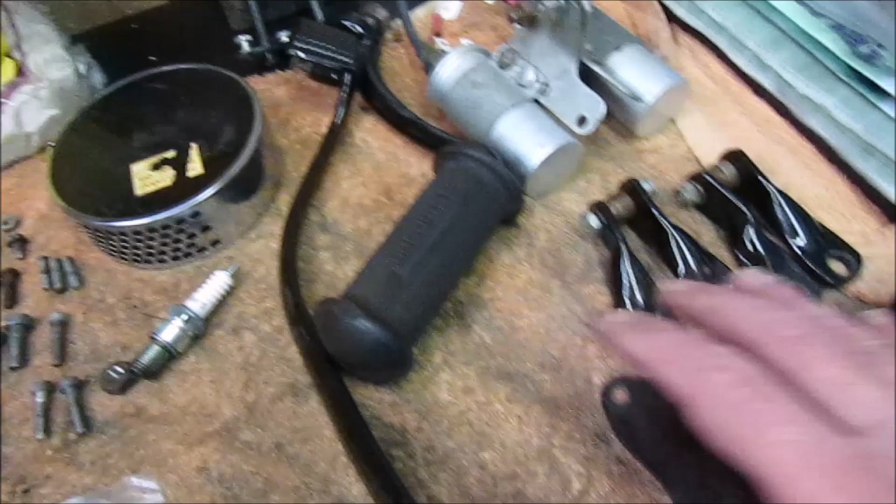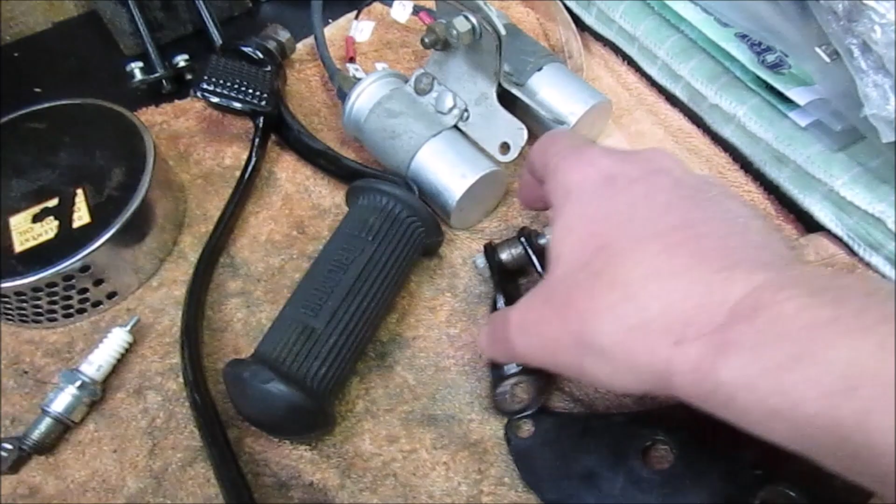Also sifted through, found a few more bits. Then we've got our miscellaneous. Obviously we've still got the left side engine bracket, footrest hanger, footrest, rear brake lever, got the coils to do, and try and work out what these are for. I've looked through the manual and as yet haven't found anything for those.

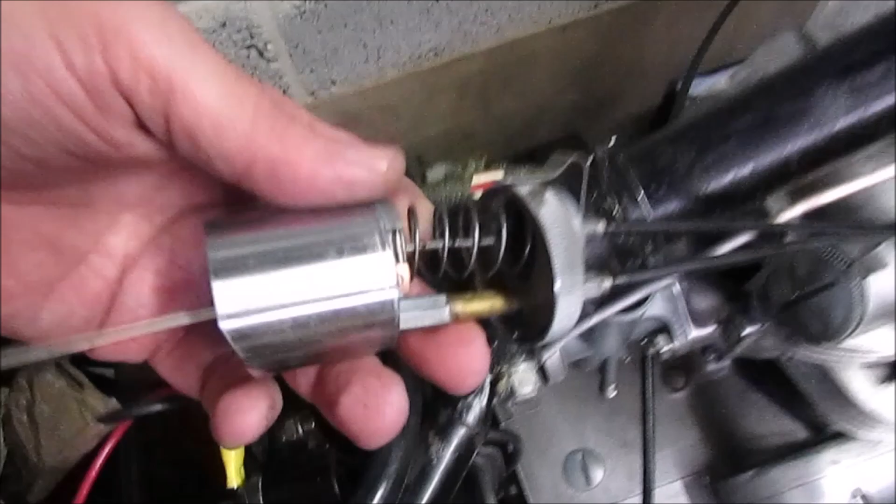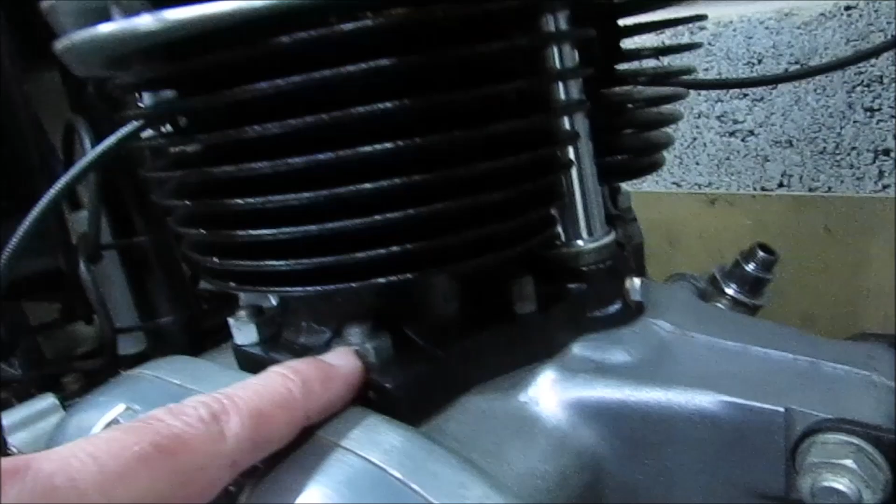So I've unwrapped also the actual throttle, so we can get that slid in. I'm going to have to take the carb off unfortunately and slide it in, get the airbox in, but get these bolts in. And the inner nuts, as you can see I've got the outers, now I've found the inners, so I need to get them done, get the tacho installed, just start working through.

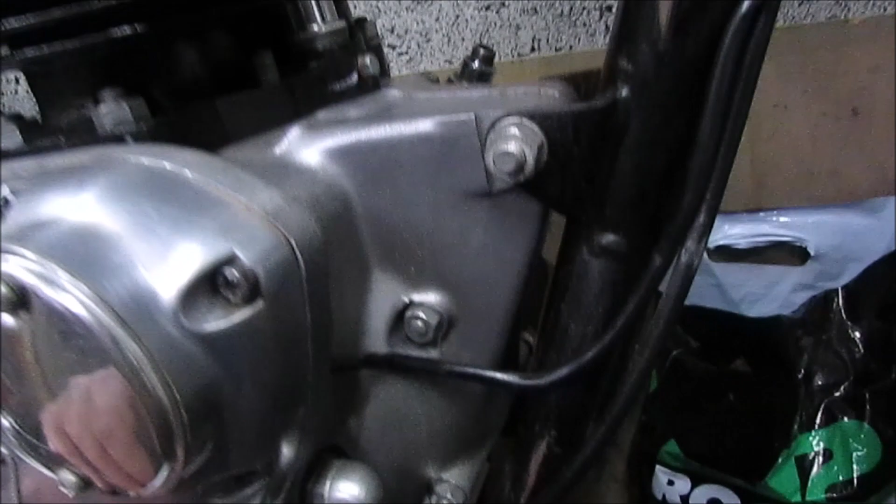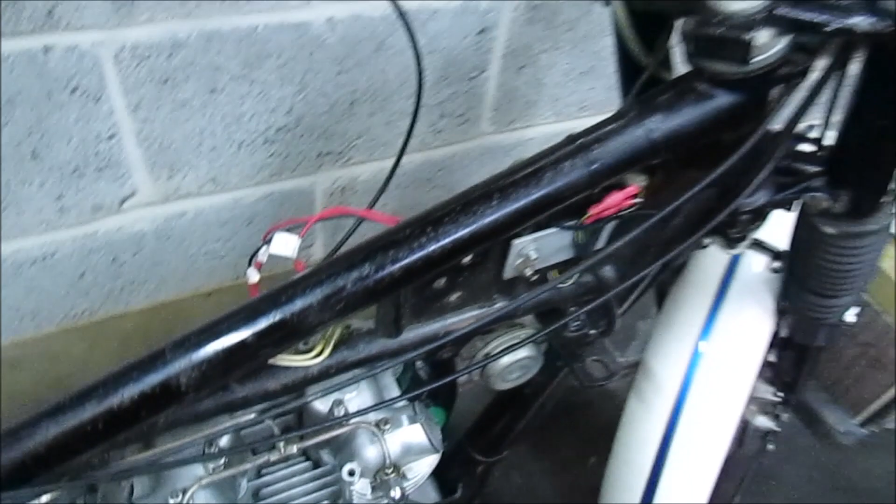I managed to find the tank rubbers, so we've got one at the back, one here, one on the other side, and then it's into my favourite area, wiring. Should be quite a simple wiring loom. Most of it's been numbered or actually labelled. Just want to see how much of this side we can get done, and then we'll turn it over and we'll start to work on this side. So we've still got clocks to go, and then a complete sweep from the front through to the back, just making sure everything's okay.

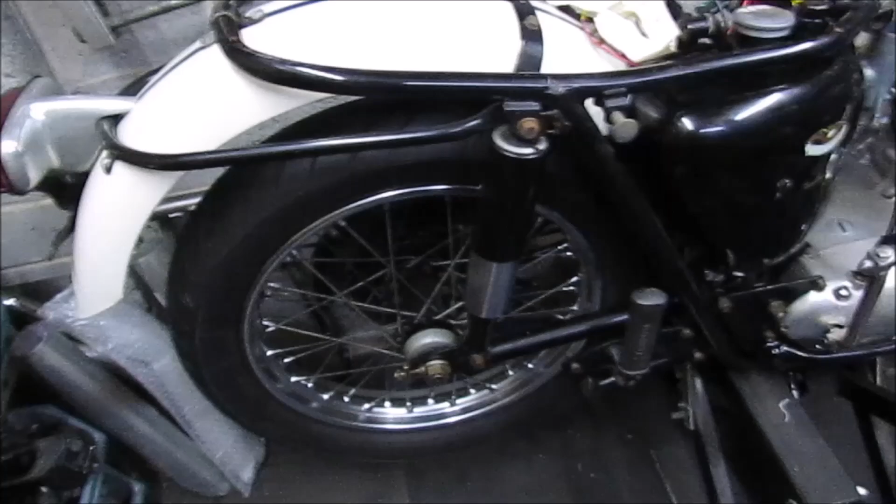But I'm happy with the progress we've made so far. It's been a big learning curve. It has been extremely exciting to do it, and I can't thank Pippa and Ian enough for giving me the opportunity to do this. It really means a lot. You know, I'm learning all the time, and this is a huge project and a huge learning curve, and basically honoured to be given the privilege to do it.

But let's crack on, get these bolts in, get these nuts in. So we'll start with the exhaust ones first. We've got one each side. And then the inlet ones. And we can get them tightened down. Then the inner nuts. So 2 front, back. And we can get them tightened down.

Right, so that's all 8 nuts on now, so I've just got to tighten the front 2, rear 2 and tighten these down. Right, so that's the 2 rocker ones this side, 2 rockers the other side done and tight, and also the inner nuts. Next thing we're going to do is torque these 2 down, same on the outside, and also these inners.

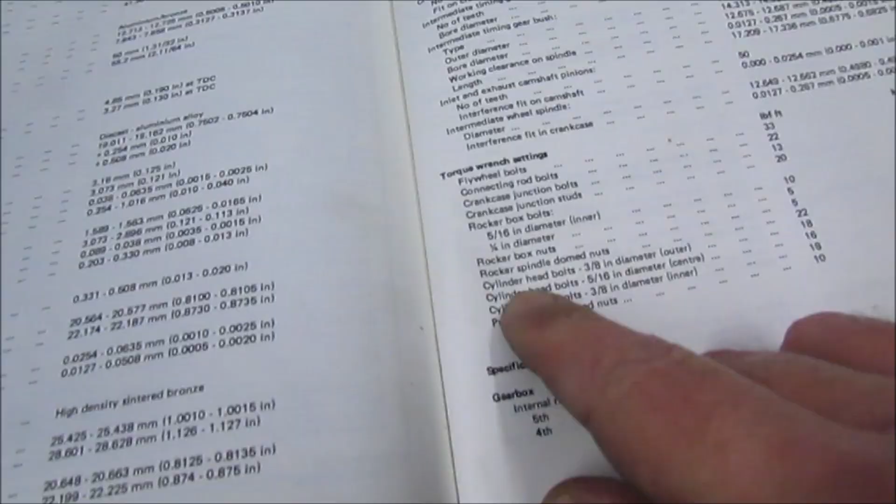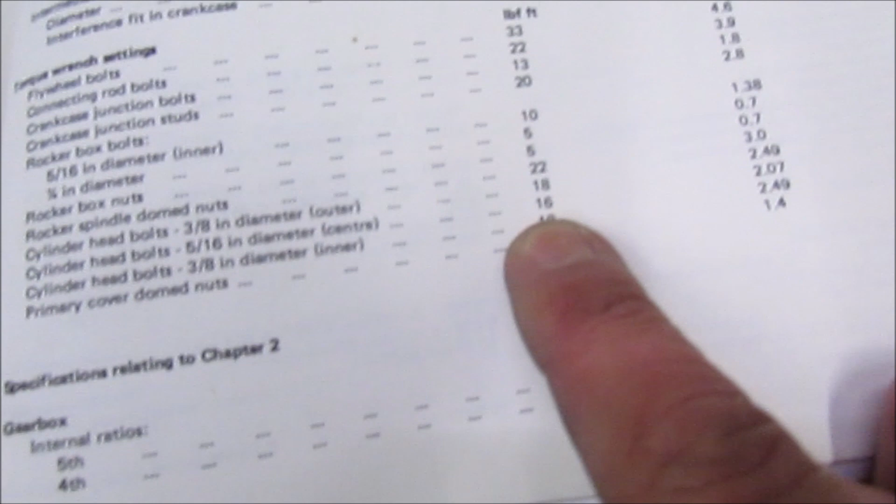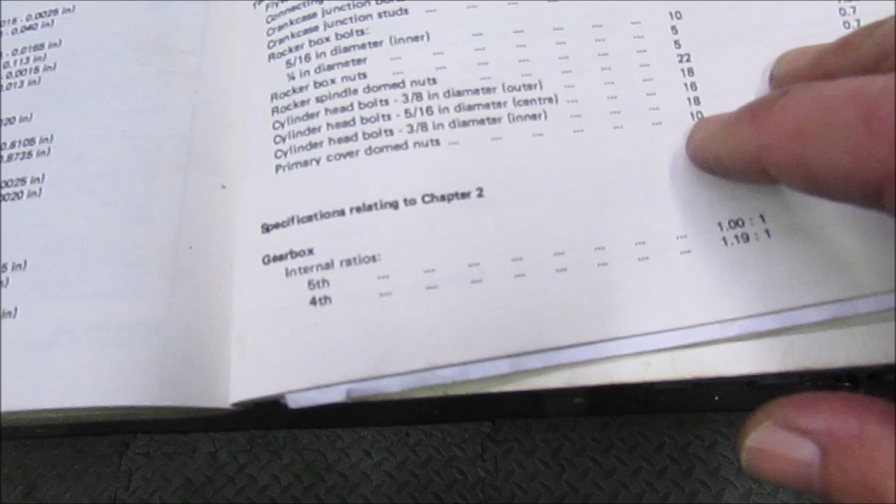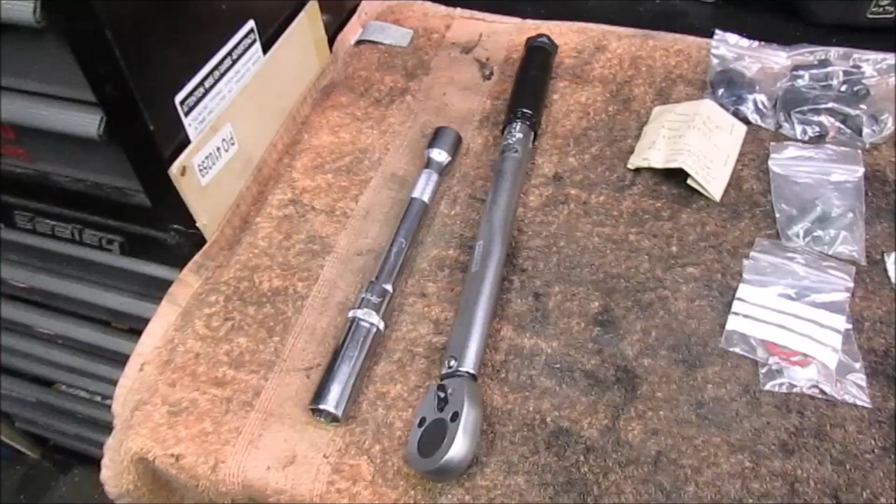So looking at the Haynes manual, if you've got it, page 153, cylinder head bolts 3/8 inch outers, 18 foot-pounds. The 5/16 centre is 16 foot-pounds, which is that one there. And the inners also 18 foot-pounds, which is these. So 18s, 18s, 16s. So torque wrench is out, ready. Just got to set it to 18, and then we can get those done.

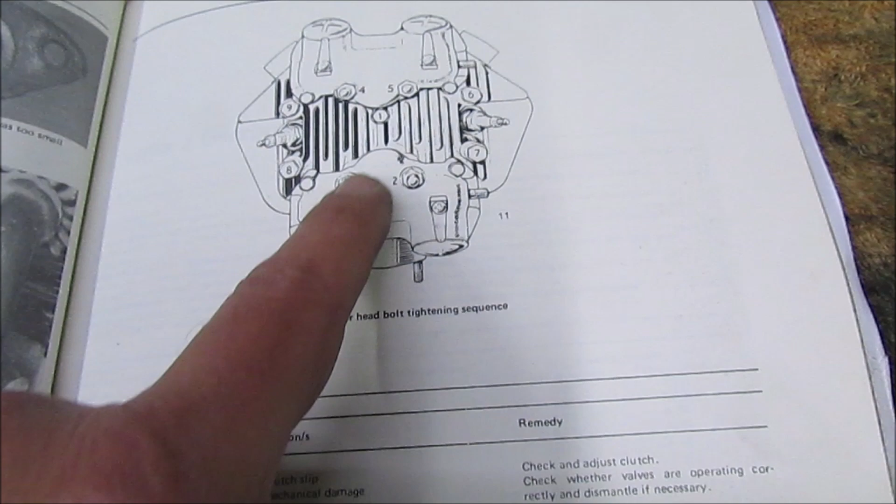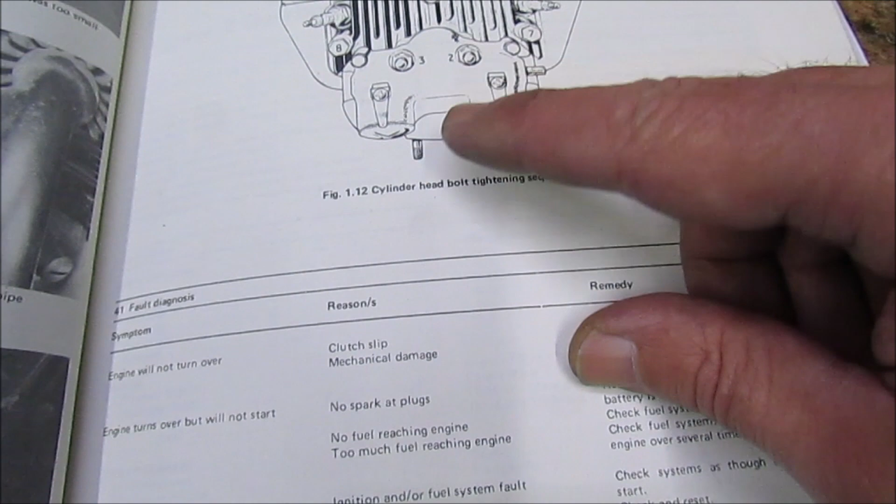Right, last thing before I nearly forgot, the actual cylinder head bolt tightening sequence. So I'm going to have to interchange as centre 2, 3, 4, 5, 6, 7, 8, 9. So it basically works on a pattern from the inner out. So that's the one I need to do first. So that's the back of the engine, that's the front.

So it'll be that one, that one, then that one, 4, 5, 6, 7, 8 and 9. So basically working in a spiral. Right, so here we go. I'll probably speed this up as I go around.

So that's all the head nuts now torqued down. So there's the pattern again. Alright, move on to the next job. I'll just take out this carb quickly, then we can get this slide in. I'll get the airbox in as well. It's not a huge amount of room. It shouldn't be too bad. Right, so that's the carb undone and off.

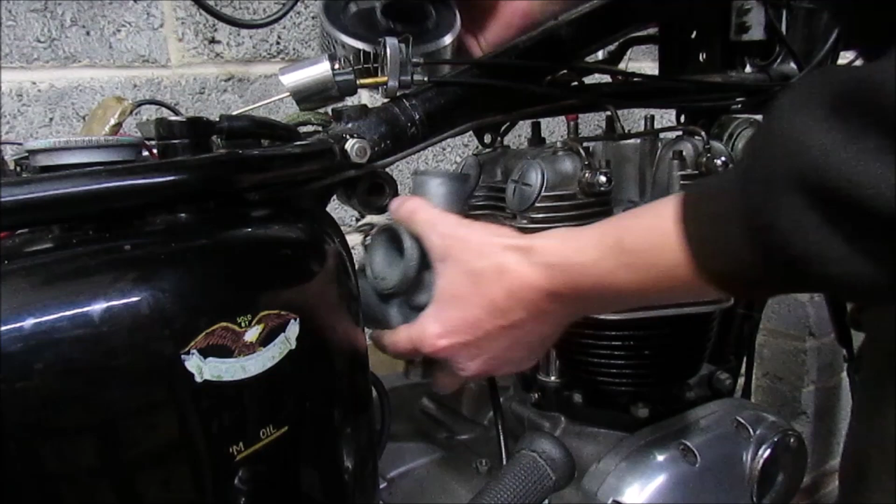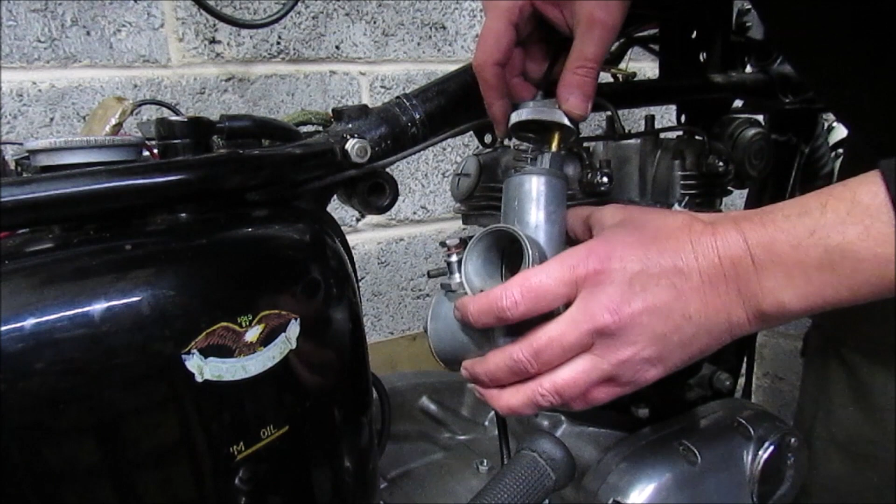I actually can slot it round and turn it so it's actually sitting in there. So the airbox will go on later. We'll actually put the fuel line in. I've got to make a fuel line up. So once the fuel line is fitted, the airbox can go in. So for now, I need to make sure I get this the right way around. Right, so this plunger, you can see in there, fits at the top.

Which is actually easier said than done. Right, okay, I've just noticed I need to release that screw, which will remove that so I can actually screw that in. All learning. Right, let me get a screwdriver and we can take that screw out.

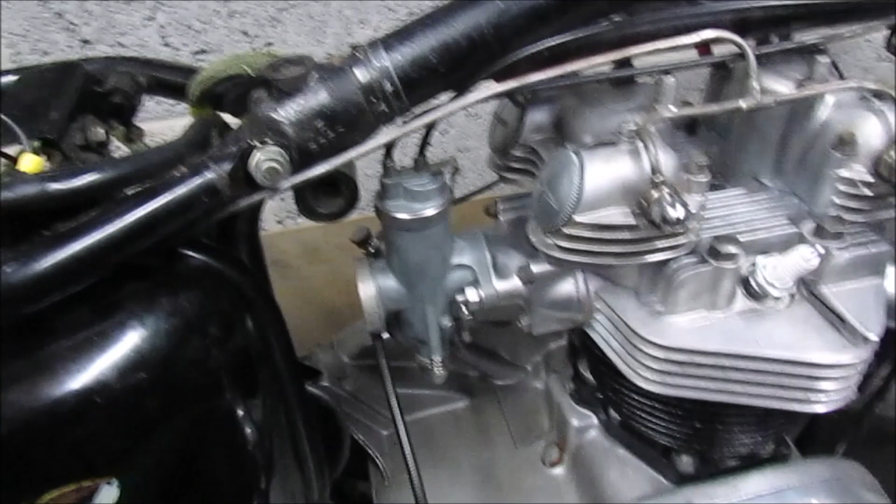Right, so I've just got to bolt that in. Right, so that's all nicely now back in place. Tuck the cables behind for now. Need to adjust slightly. Right, so now trying to see what other cables we've got. Right, there's another one there. So that one.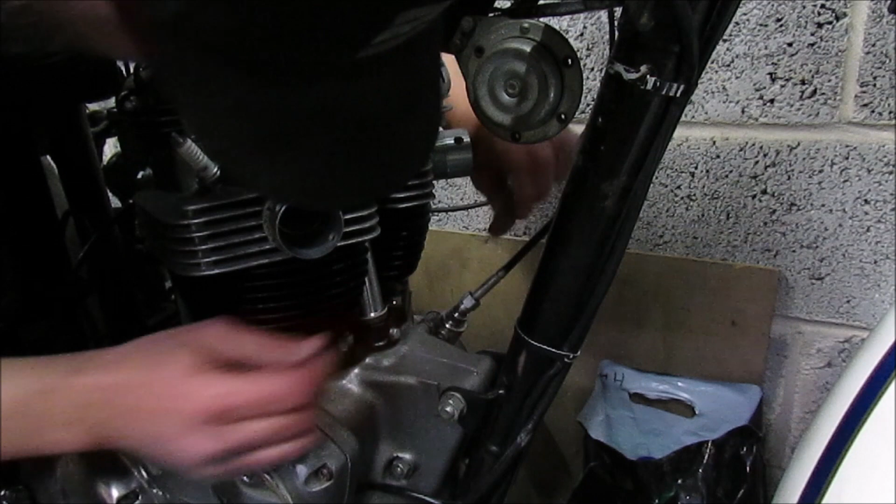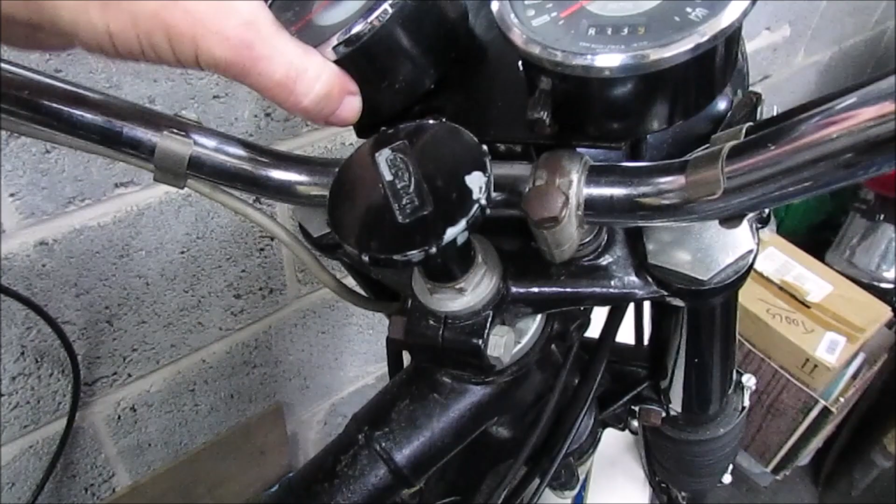Right, so that one is tacho. So I just need to, that's now installed that end. I just need to get it fixed to the clock. And then this one is speedo. Right, so we'll trace that one back later.

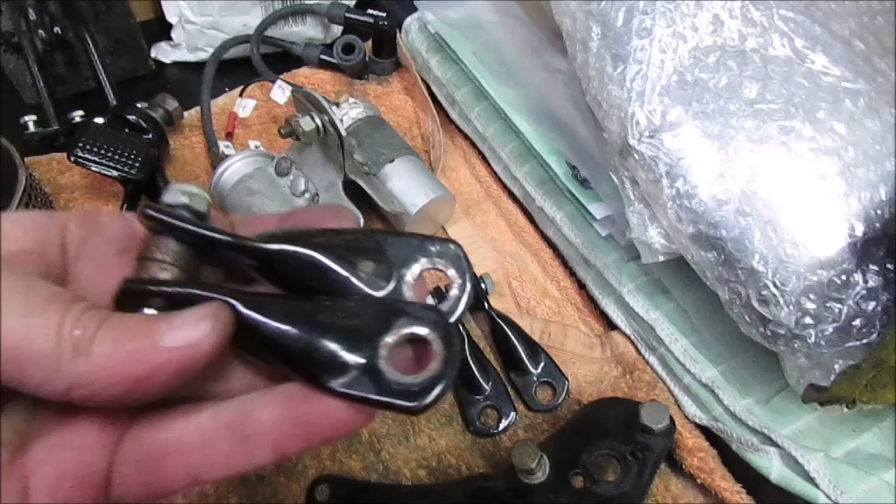So tacho's installed, engine this side, obviously I've got exhaust to go on, it's basically done. So airbox we can't put in until we get the fuel lines in. So I think next one we move up to get the coils installed. But like I say, I need to have a look and find out what these are for.

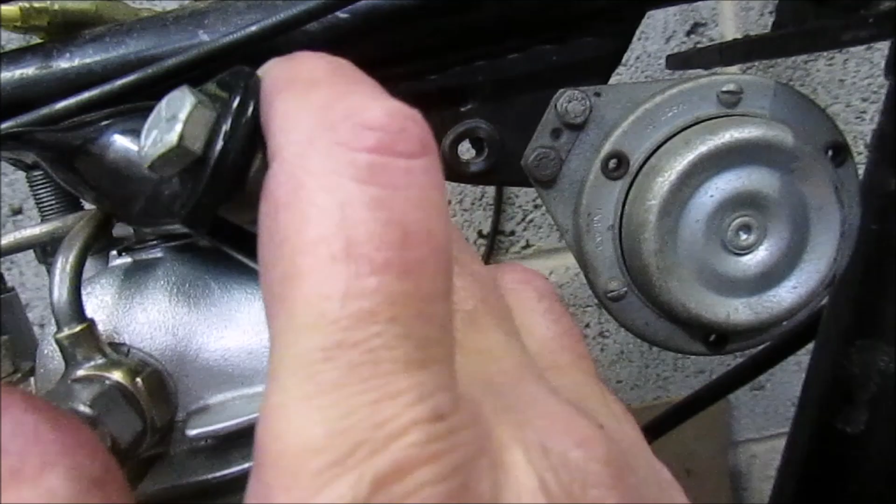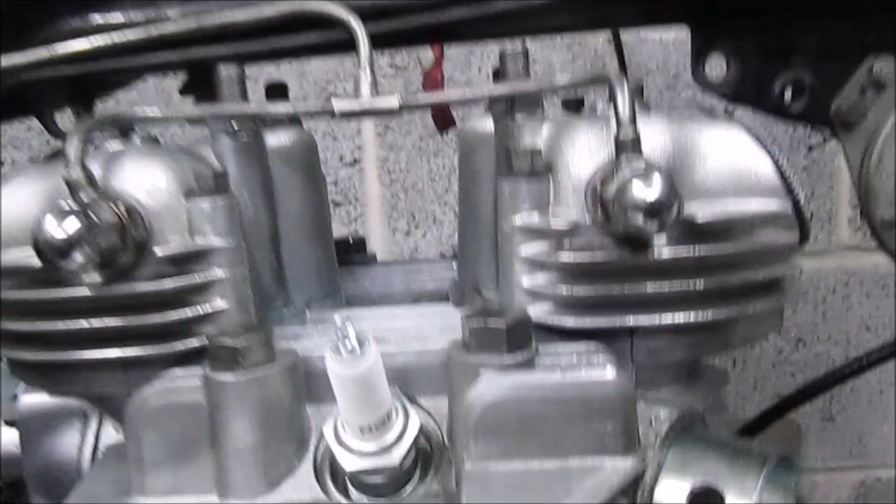Right, just had a quick look through the manual and actually worked out what they're for. Right, get you in shot this time. Right, these basically fit on top of there, bolt through that hole, and the other one obviously fits the other side, and then you've got the same this side that bolt through that hole, so I can get them installed. So that basically supports the top of the engine to the frame.

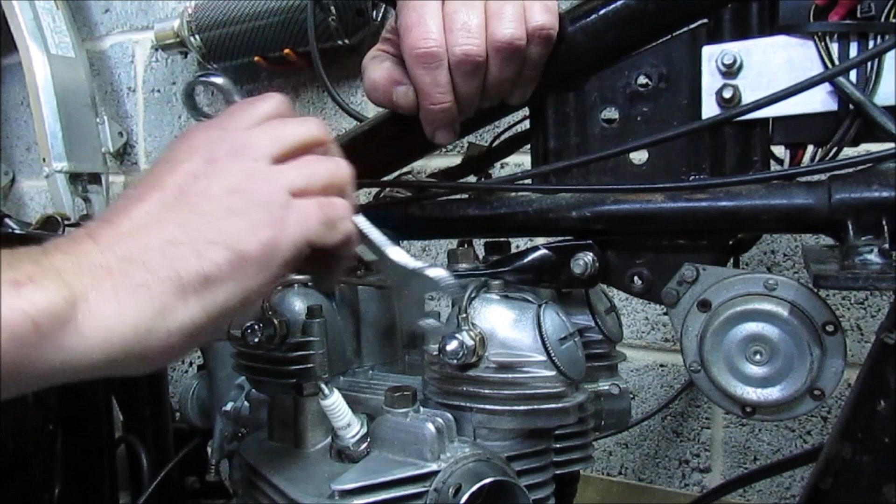Right, so let me get them in place. Right, so they're now tight and in place. I've actually tucked the oil line. Actually tucks underneath. So that explains where the brackets came from. So that kind of makes sense now.

Right, next job, probably the last for this episode. Let's get these coils installed. As far as I'm aware, they go through these 2 points. So I'm imagining facing backwards, but we'll double check that. And then going, actually no, probably through these two.

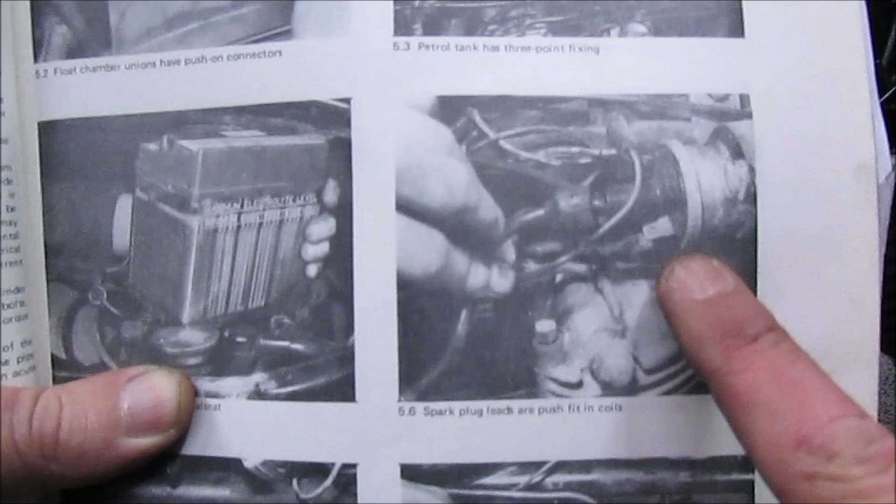Right, let me just double check. I think it should be that way. I think that'd be too far. Yep, see a picture there. They're actually facing backwards. Right, so let's get them unbolted, get them installed, and tightened up. Definitely looking more like a bike.

So I can't do much more with the carb because obviously I've got to make the fuel lines up. I think we've basically covered everything on this side. Tacho's installed, coils installed, just got to wire them in. Oil lines installed, brackets installed to hold the engine. This side bracket installed, footrest.

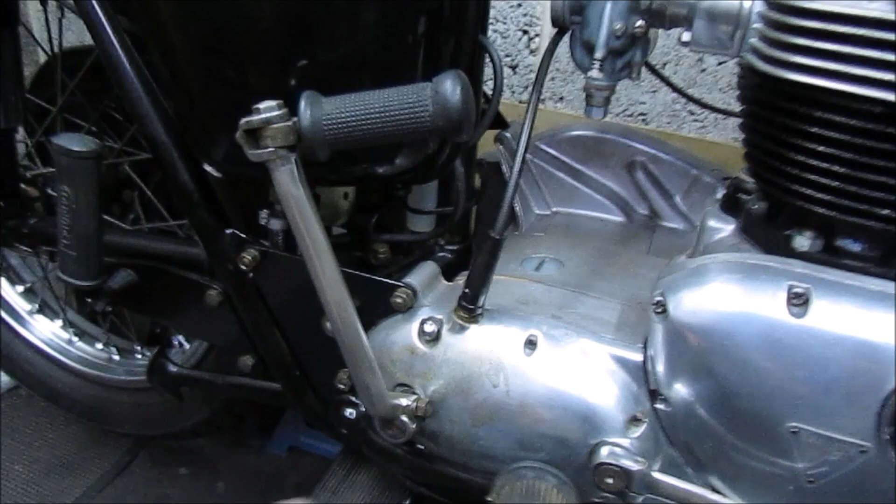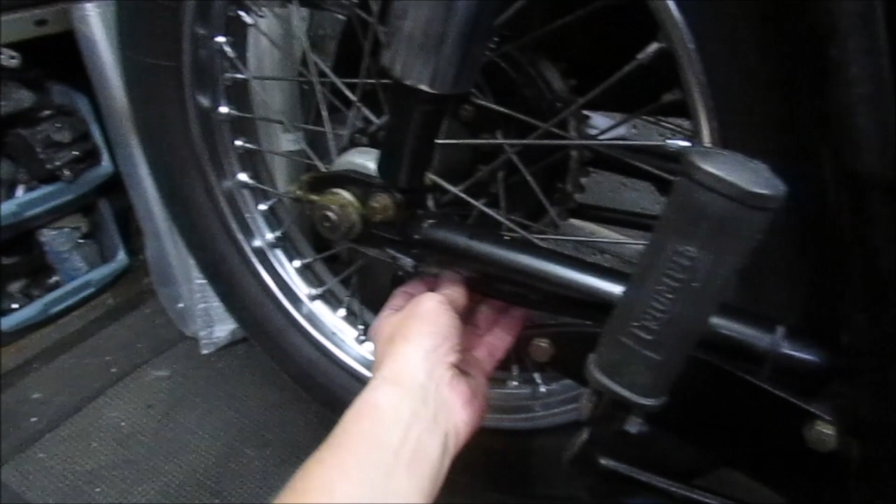I need to work out where this speedo cable goes to because it disappears in here somewhere. So let's just, there it is. But the speedo's actually on the rear wheel. Interesting. Yeah. Okay. Different. I say, every time I look at this I'm learning new things and seeing how things are done.

I may need to loosen off this plate and redirect that cable because it is hanging down a bit and a bit tight. But we will get to that. But no, I think as for this side, I think it was practically there. So I think next episode we'll spin the bike round and start working on the primary side.

I'm going to do the front in a separate episode, so that'll incorporate getting all the clocks in place, getting that gator out, and then the rear I'll do in a separate episode.

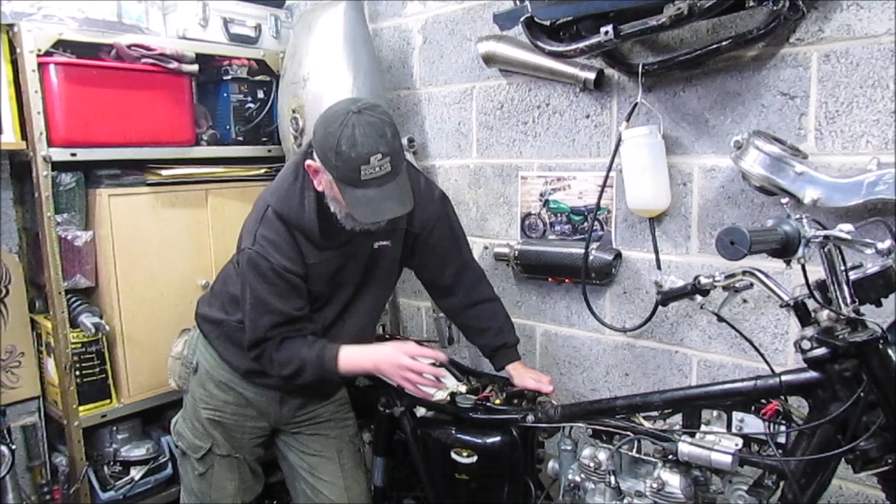Right, so thanks for joining me on that one. So it's just slow progress, little bits, trying to work out what goes where. So I'm glad we've actually worked out these top engine brackets, got the coils done, carbs installed, so we've got the fuel line to go. I've got to make that, so that's going to be an interesting one. I'm going to need time to study how that actually goes together and how it's crimped. Then the actual airbox can go on.

But no, as I said, this side, practically there, so we're going to move on to the primary side, and then we'll continue through. But yeah, just chipping away each episode, a little bit more done. Wiring I'm going to save till later, because you know how much I love wiring. It's never been a strong point of mine, but shouldn't be too bad. Most of it is labelled, numbered, so I should be able to work it out.